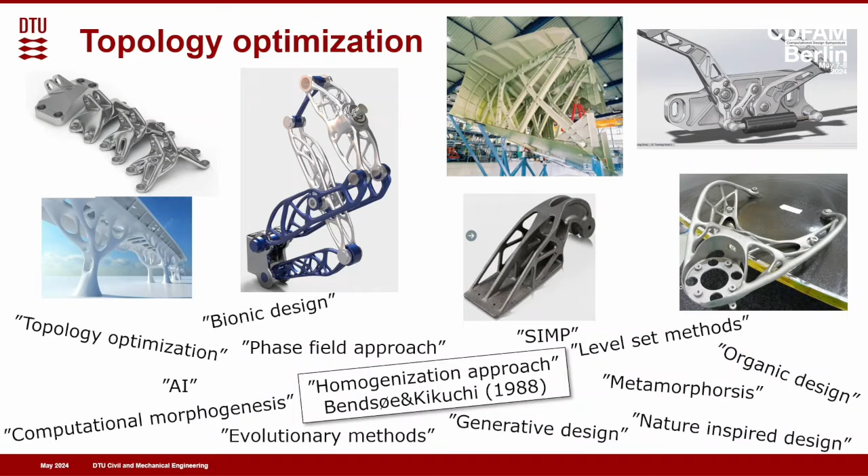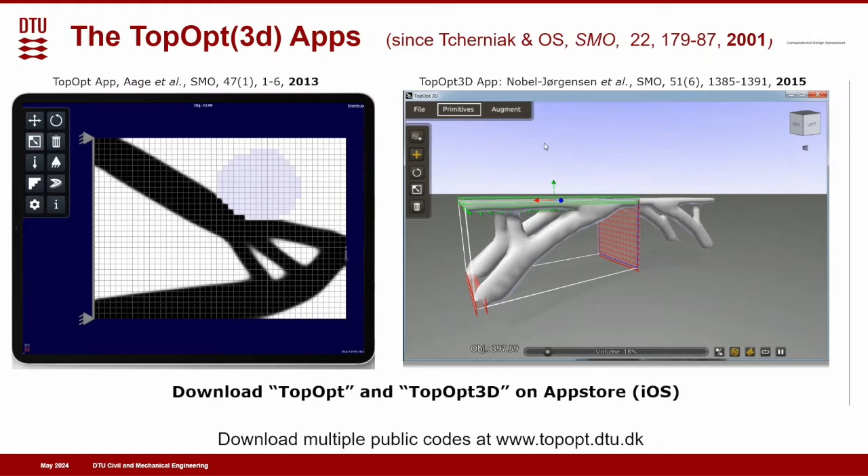First of all, we have been advocating interactive topology optimization apps since 2001. I hope most of you have seen these apps. If not, I invite you to download them on your iPhone. We have the 2D app and the 3D app for topology optimization. I would say it's almost addictive to sit and play with these.

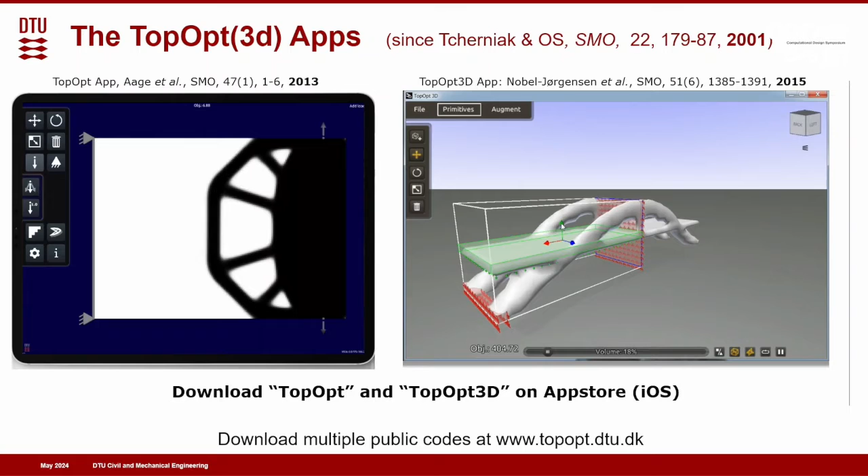What's also interesting is that the 2D version on the left is actually just a real-time screen dump from my iPhone. So you can do this real-time, change boundary conditions, add passive domains and all kinds of stuff. The movie on the right is the 3D app. It's sped up a little, but I think even with a new iPad this would also be real-time.

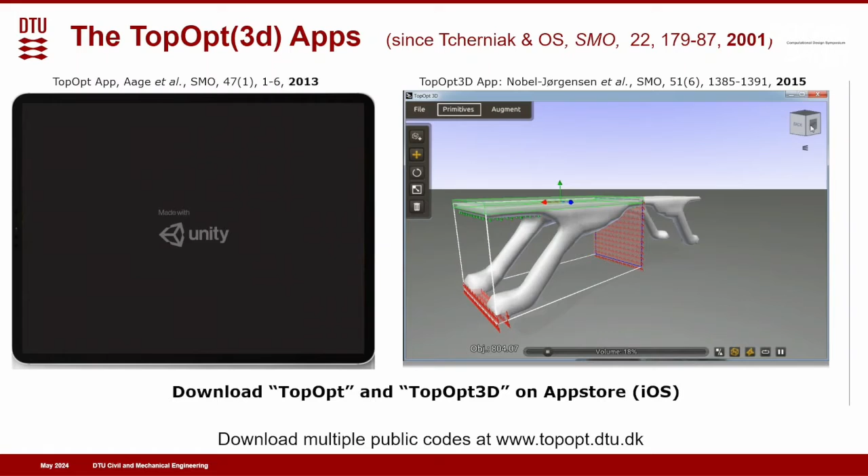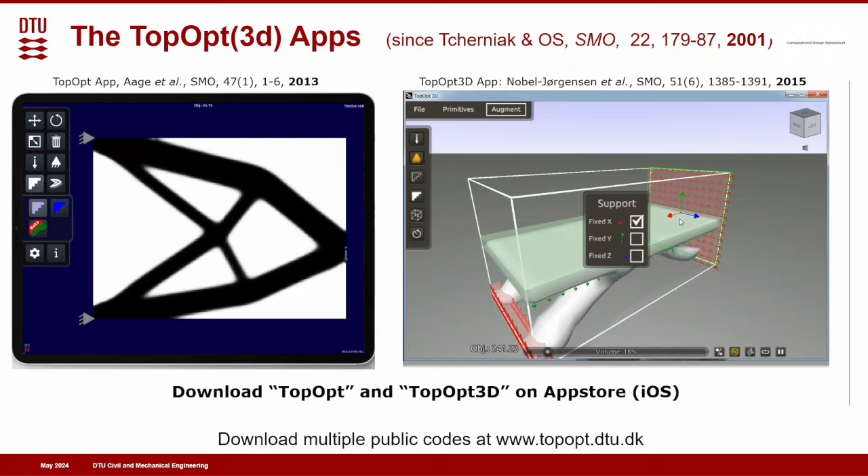So there's a lot of fun playing with these, and I think it also demonstrates how efficient gradient-based topology optimization actually is. This was one aspect, and I'd say it's also really hard to compete with it if you don't use gradients, or even if you want to use AI, and I will come back to that in a second.

The other application area we have been looking at is pushing towards very large structural design problems. So 6 years ago, we were the first to do topology optimization with more than 1 billion finite elements, or design variables actually. This is why we call it gigascale topology optimization. We did that for a Boeing 777 wing structure and showed potential weight savings there.

A couple of years later, we went to a bridge design, a suspension bridge. We discretized the design with 2 billion design variables and 7 billion degrees of freedom. We showed potential savings of 30% on the bridge deck itself, and with knock-on effects, 20% weight savings on the full bridge, or potentially we could make longer span bridges. That was in collaboration with civil engineers.

So these were both, I guess, success stories of what can be done in topology optimization. What wasn't so good is that the wing study required 1 million CPU hours on a supercomputer, and the bridge structure required 2 million CPU hours. So obviously there's room for improvement there. We would like to cut that down.

If you read a lot of the literature and articles on the internet, people would say, hey, this is a nice occasion. Many of the citations we get are from AI papers saying this stinks because it uses so much CPU power, let's do this with AI at the click of a finger. I'm not sure this is the way to go, or actually I'm pretty sure this is not the way to go. And why is that?

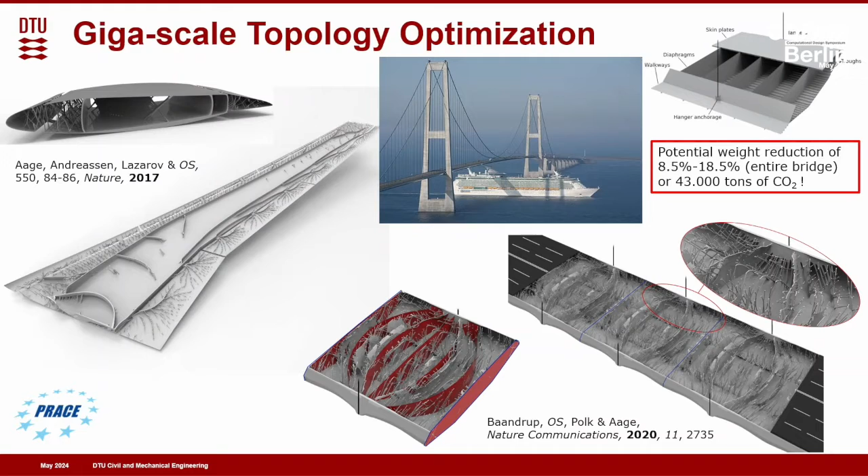Partly we are PDE-based optimizers here, so providing training data for this is extremely expensive. We can also set up other things, but I will come back to that in a second. I'll just refer you to a review paper done with my former PhD student, Rebecca, who is sitting here.

She dug really deep into the whole literature on topology optimization using AI. We divided it into 5 different areas: acceleration methods, reduction, post-processing, design, and diversity, and then what we could call the wet dream of topology optimizers, directly substituting standard density-based topology optimization with AI. And why doesn't it work?

I already said it's expensive to generate data, but there are also other issues here. For example, if we generate a lot of training data, as Andreas said, well, AI is just an interpolation, so we are not going to go outside the training data. We may get designs that interpolate between different training data, but if we are optimizers, we expect to get out there, and that's really why we are here.

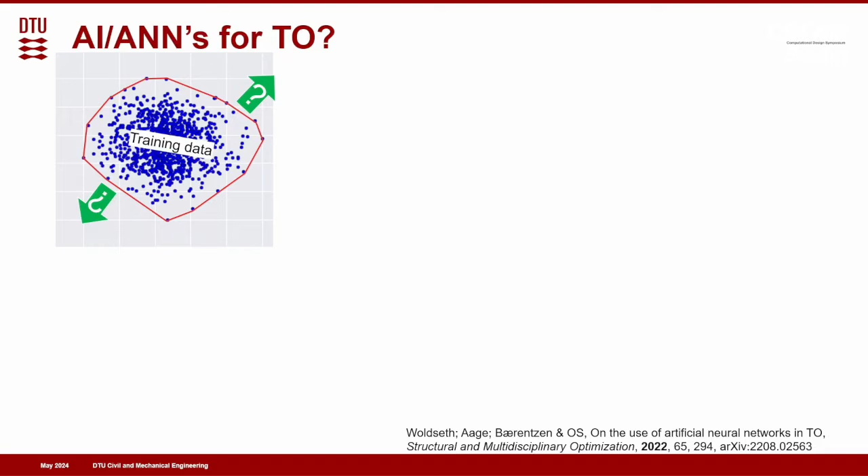We want to make the best possible use of materials and resources. Other things are that actually the training data is disjunct. You could have a very simple design problem: just a vertical load, and 3 supports at the bottom. The optimized structure is just a vertical beam. But you make an epsilon perturbation of the direction of the load, and suddenly the topology changes. It needs a side bar also to support it. So how do you do interpolation in AI, when you actually get significant changes in the topology?

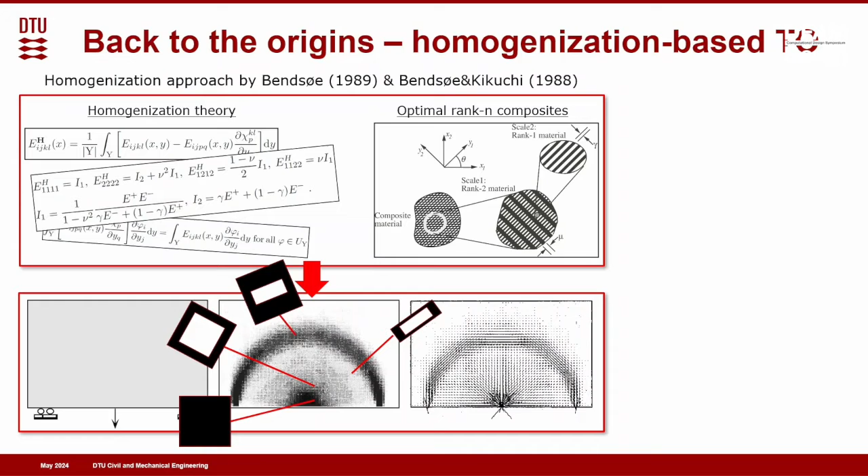I'll come back to that in a second, but just to mention, we know the optimal stiffness and optimal microstructure. In 2D, if there's only one load case, it's perpendicular laminations. If we have two or more load cases, we also know the optimal microstructures, and they can be found analytically.

In 3D, interestingly, for one load case the optimal microstructure is sort of a square or rectangular hole structure, a closed wall cell. If you have two or more load cases, there are more layers in different directions, up to 6 or 7 if you want symmetries and periodicity.

This is an interesting point to make: truss lattice structures are not optimal. They are, in fact, 2 to 3 times less stiff than closed wall structures. I'll come back to that later, but there has to be good reasons to do truss lattice structures, because usually they are so bad it would actually be better to do solid structures.

For now, I'm going to talk about closed wall structures, and obviously if you're doing a powder-based process there might be some issues there, but then you have to acknowledge that. So what do we do here?

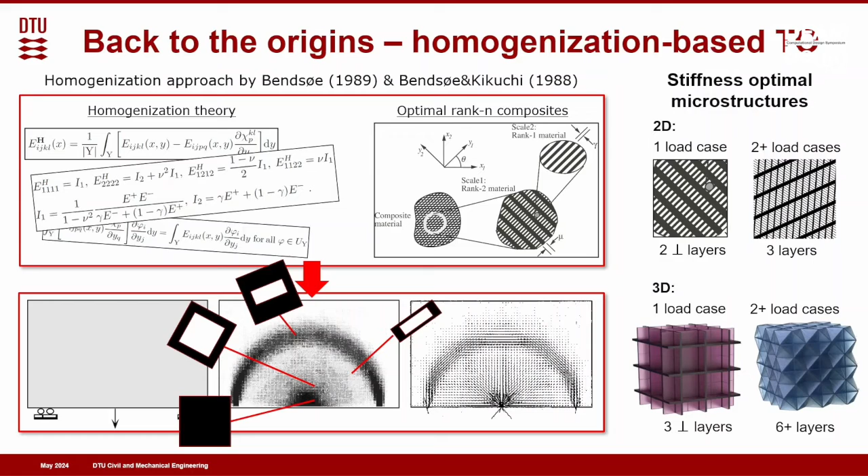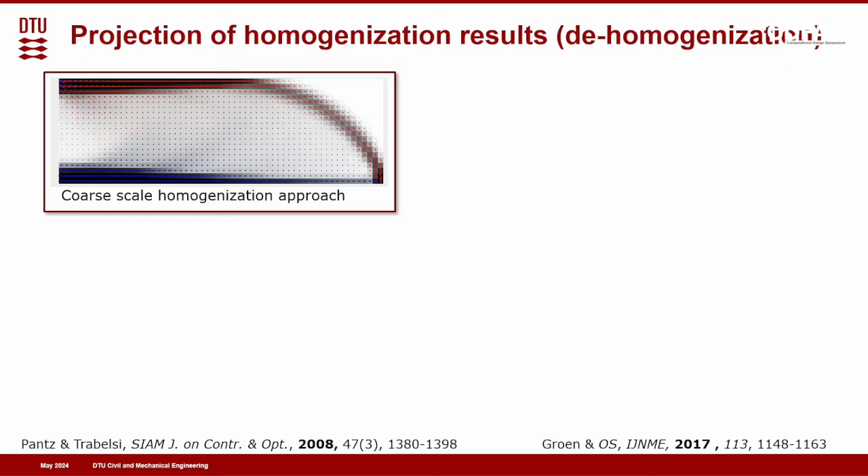For the dehomogenization, we do exactly what Bendsøe and Kikuchi did 35 years ago. We have a coarse scale, and we do a local optimization with 3 variables for this one load case problem: the orientation and the lamination thicknesses. It gives us this mushy looking picture here.

Then we have an intermediate step where we introduce 2 auxiliary fields with the special property that their gradient at any point corresponds to the direction of the composites from the homogenization solution. This is a least squares problem we have to solve.

If we take cosines of these fields, we get these nice zebra patterns. Then if we take those 2 zebra patterns, reintroduce the lamination thicknesses and put them together, we get these beautiful and highly optimal structures, close to the theoretical optimum.

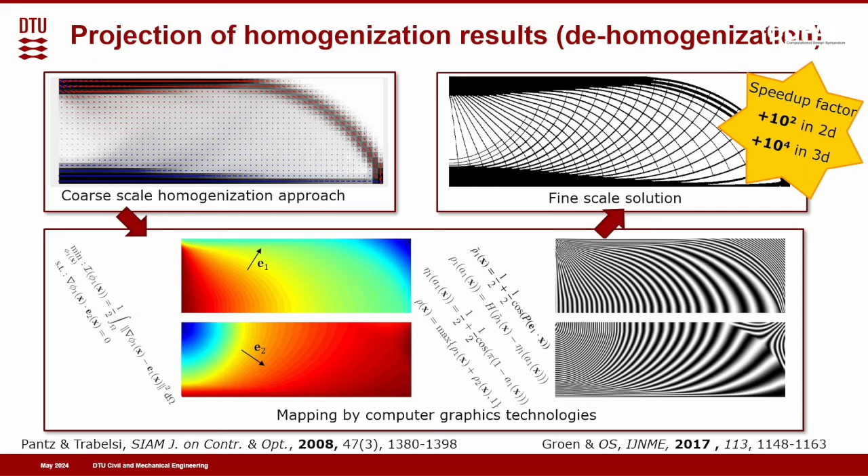The nice thing is that compared to a similar topology optimization procedure, we gain something between 100 and 10,000 times in CPU speed up. So this is an extremely efficient method, and I can show you lots of pictures.

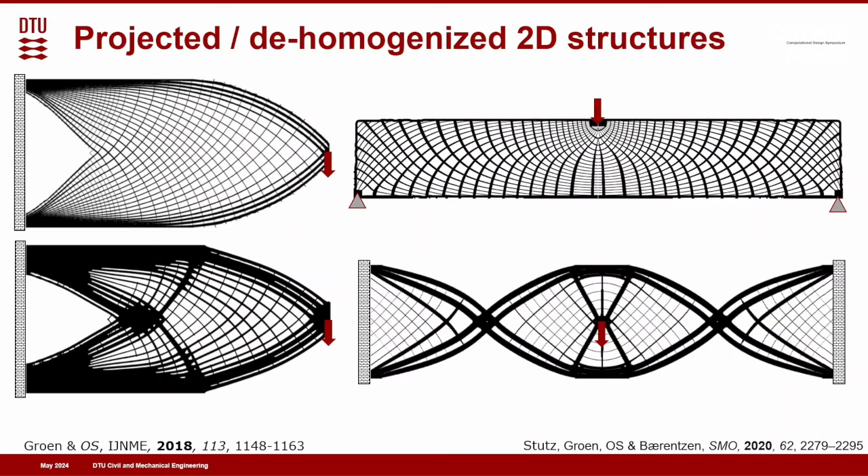These are some of the structures here, and you can sort of see that form follows function - this material is ideally oriented along the stress path all over. Interestingly, we just have a few percent performance decrease compared to the theoretical optimum from the homogenization-based solution. We get very close to these, but at a fraction of the time.

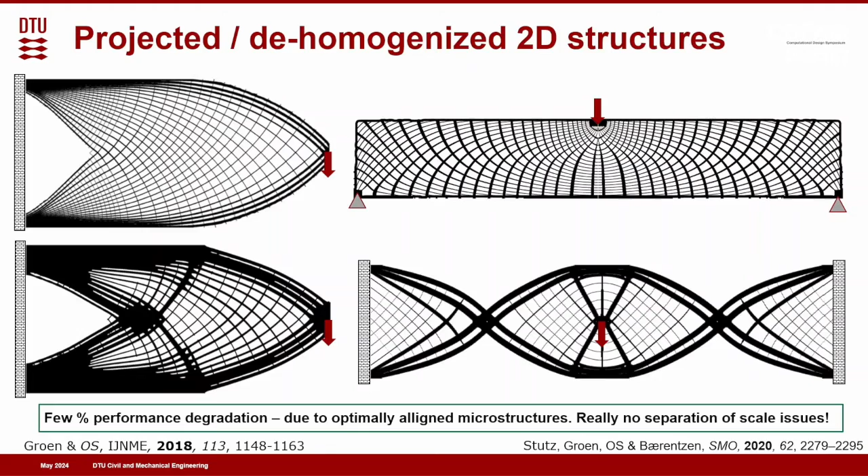Just to show you, this was a single load case. This here is multiple loading cases, also done by my other former PhD student, Peter, who is here in the audience.

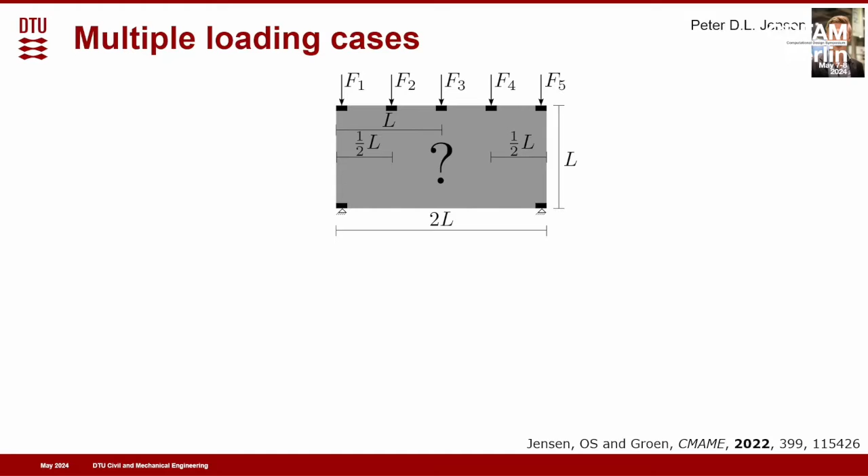This is a standard test case in the field, 5 load cases. We need to distribute now 3 different lamination directions - there are formulas to do that. This is a homogenization-based solution, again with these mushy gray pictures.

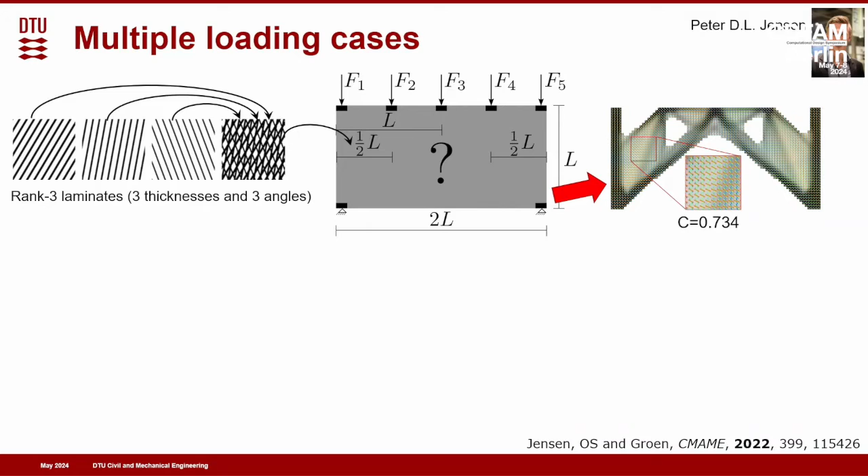As a reference, we can do a topology optimization, just a crude Matlab implementation with a very fine resolution. We can get a compliance that is just a few percent, or 1%, above this theoretically optimum structure. But it costs almost a full day of CPU time on a laptop PC.

Now with the dehomogenization approach, this is just a computer graphics thing. We do the coarse optimization, then map the structure to this anisotropic rank 3 structure. We get very similar compliance, just a few percent increase, and we do it within minutes.

Finally, if you say, okay, I insist, I want to have a triangular microstructure that we still can grade - well, we could do that also with the dehomogenization approach.

It's more efficient, we admit that, but it's at the cost of another 10-15% increase in the compliance, or decrease in the stiffness. So really you want to do these locally adapted microstructures to get the full benefit.

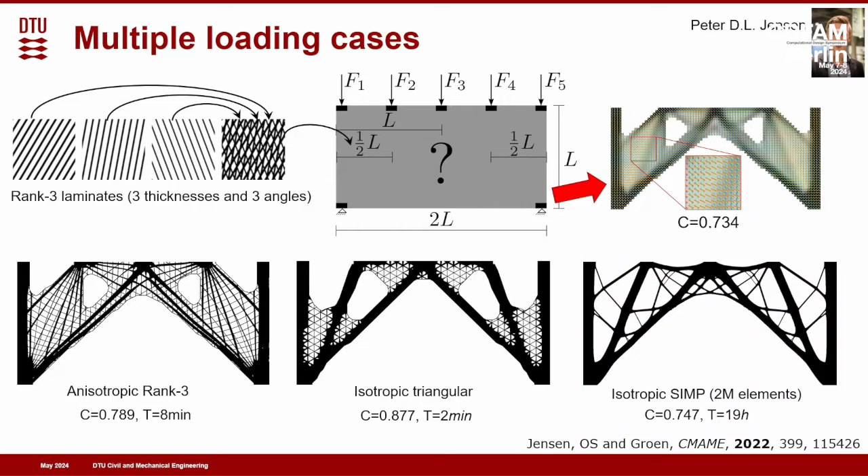And we also see here it doesn't really want the microstructure. It does it here for multiple loading cases, but if we just had one load case, it wouldn't like the triangular microstructure at all. So this was in 2D.

Peter and co-workers have done the same thing in 3D. So we have solved the very famous GE jet engine bracket. And with these layers, you can also start controlling how many layers you want to have locally. Ideally, the optimization just selects how many layers it wants, but you can also enforce to have 3 layers, for example, to get more stability, and I will come back to that.

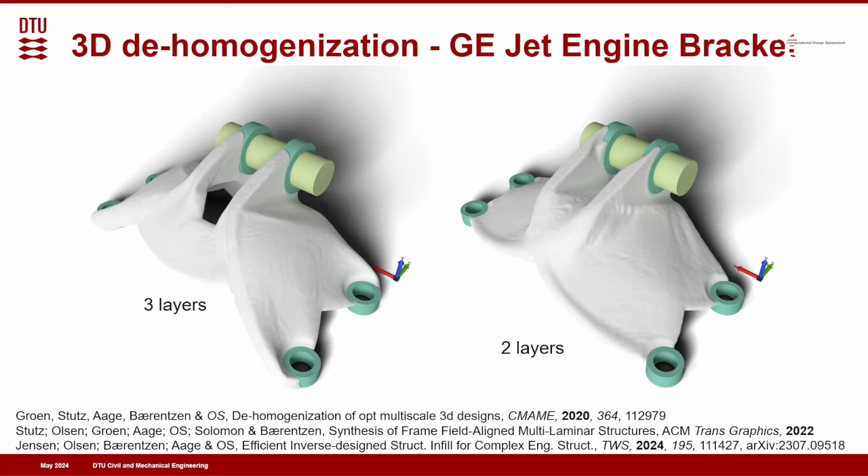So the disadvantage, of course, of having optimal closed structures is also you don't see the beautiful structures that are inside. And maybe that is a sales killer when we are in additive manufacturing, but that's sort of another thing. So this works really nice, but it still takes some time. This example here still runs for some hours to get these results.

I said before we had thought that we had an idea of using AI to do this dehomogenization. It could be trained on artificial data. We actually showed we could do it more efficiently. But in that process, also in the process of writing the review paper, Rebecca and our colleagues in the computer graphics department came up with a different idea to do this.

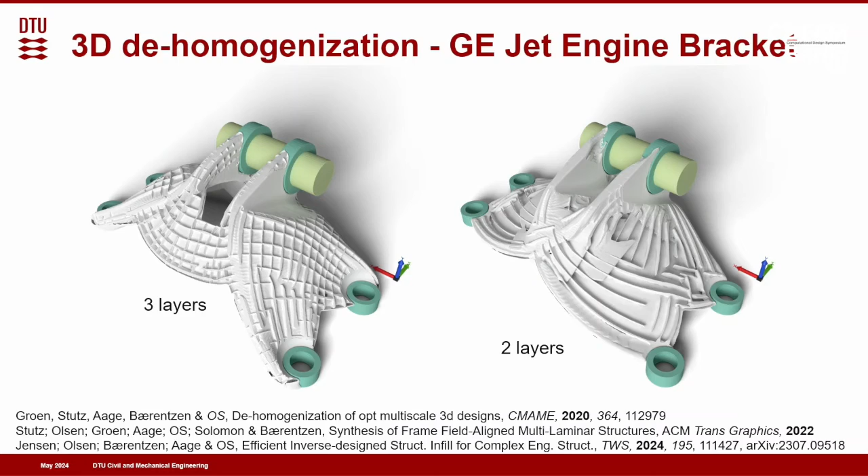And so essentially, again, I cannot go into the full details, but we are using processes that are called something like procedural noise from computer graphics. These are extremely efficient ways to both make surface texturing, but also generate geometries. And essentially, they are run on GPUs in a fraction of a second.

And that idea is the same. We do the basic homogenization-based topology optimization, but then instead of introducing these intermediate fields, we introduce so-called phasors or complex Gabor functions. And these are sort of small circular domains that have waves in them. They overlap with the neighbors, and in an intricate way, they generate these zebra stripe patterns.

So on the outside, these are not connected. There are different things. There are singularities when there's divergence in the field. But with some ingenious post-processing, Rebecca has turned this into something that always ensures connected structures and satisfying the length constraints and stuff like that.

And again, I'm not going to go into all the details here, but it works also in 3D. We are submitting that paper very soon. But again, it's a smart way from computer graphics, and you actually don't need to have the whole geometry in your computer. You can sort of do it layer-wise also during the manufacturing process. So this is a very nice approach.

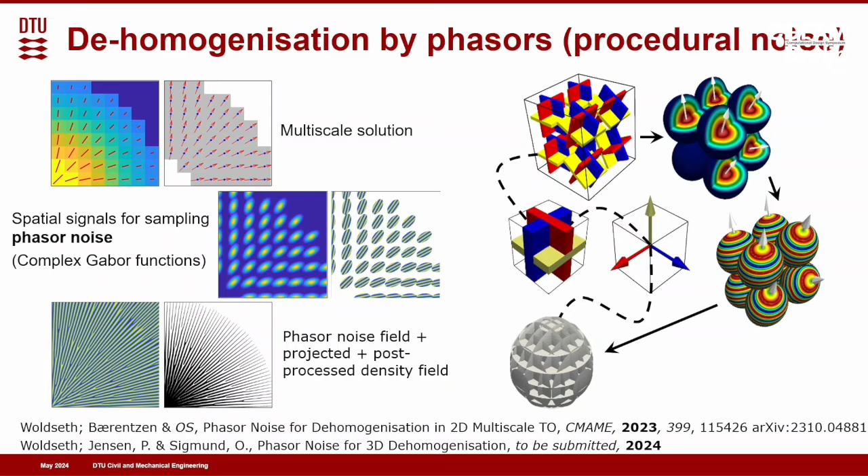And I just want to show you a couple of pictures here. So these are the dehomogenization approach in 2D. You see they're a little bit more organic due to this not having a global field that controls it, but it's more a local thing.

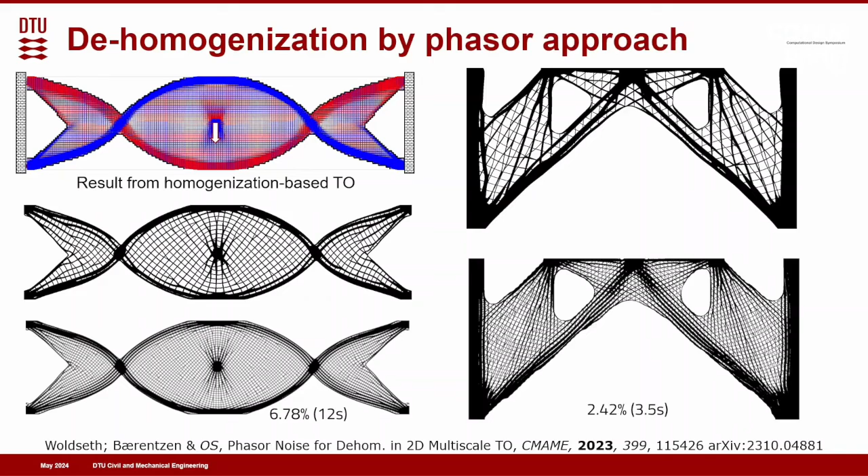But this is extremely efficient, as I said. Essentially, it's much cheaper than the topology optimization process itself. And this also leads to us approaching being able to do real-time multi-scale dehomogenization approaches for topology optimization. So we are going to publish next week, I think, when we are back from the conference, a Matlab code that does this, that will be free for download.

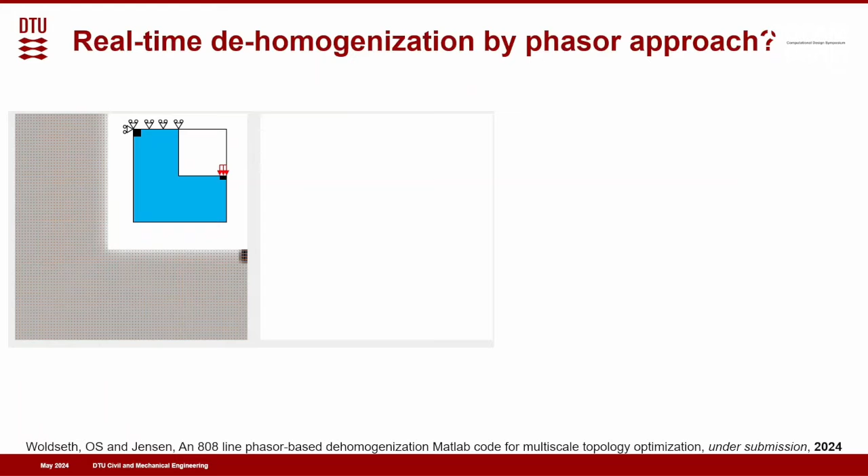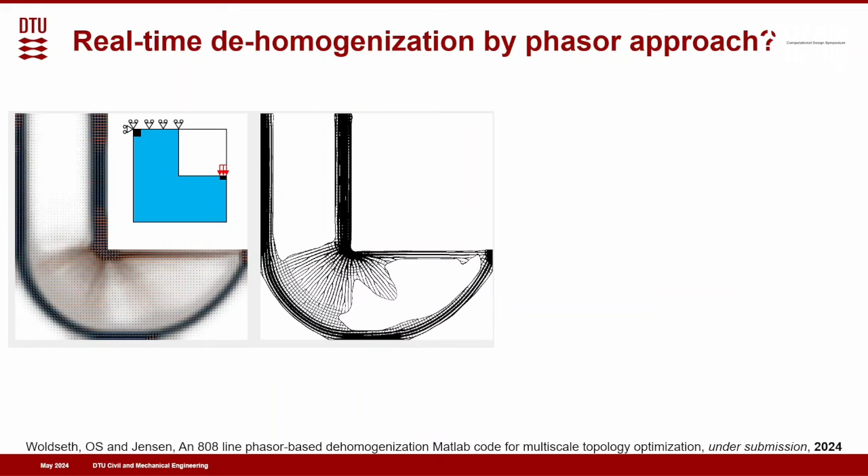And so we have this little L-beam example that's also often used. To the left, I show the homogenization result, and in the middle picture, I will show you sort of the on-the-fly dehomogenization. So we are running a couple of topology optimization iterations, and then at the same time, we are generating these multi-scale structures very efficiently using this phasor approach.

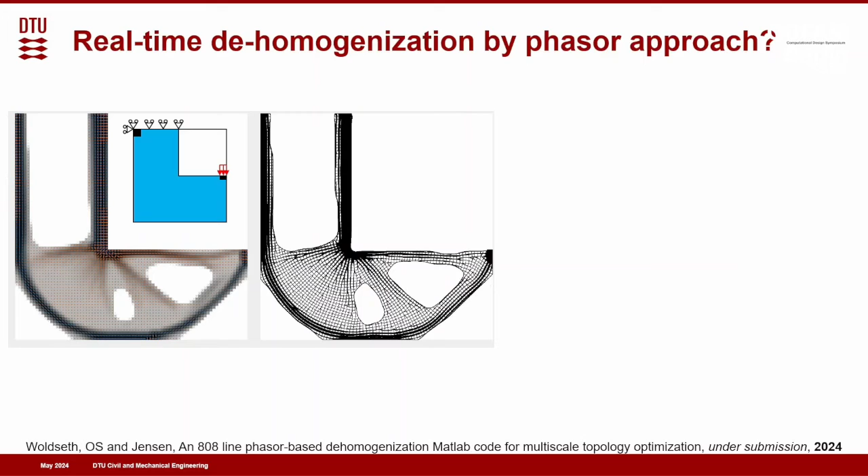And so with this efficiency, we are hoping that maybe next year, if Duane makes the conference again, we can actually offer you an app that has this multi-scale performance there.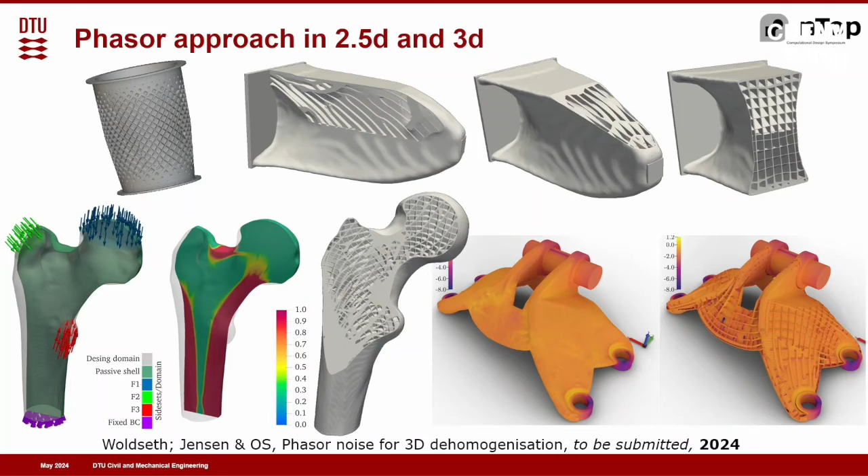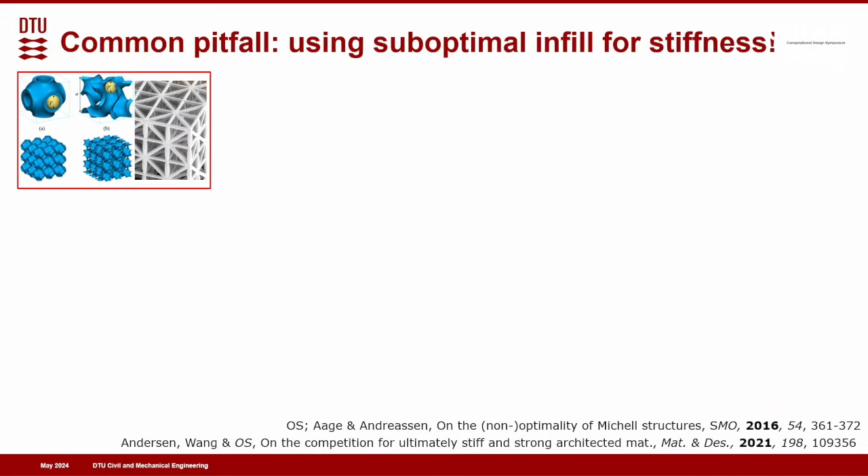Let me try with one slide to give you some more insight into why we need closed-wall structures. We see it a lot here, and also at this conference, that it's tempting to use either open truss lattice structures or TPMS microstructures in your design. Definitely they generate very beautiful structures, but sometimes it's quite dangerous to take an already optimized design and just substitute microstructure into it without doing additional verifications and optimizations.

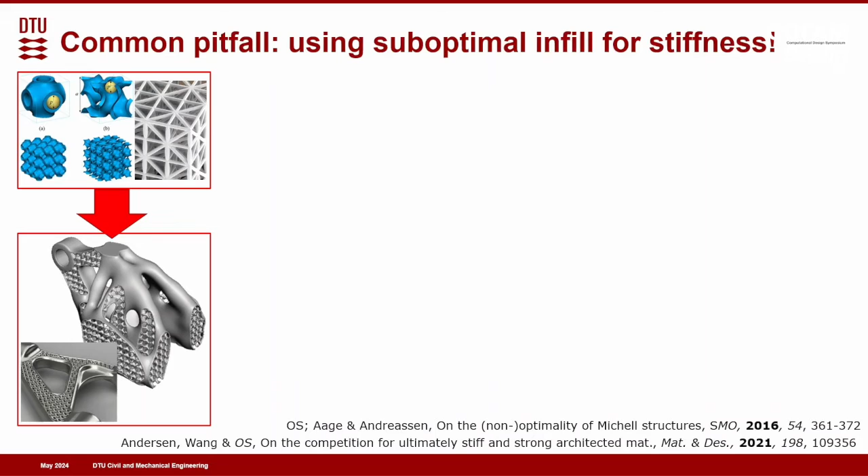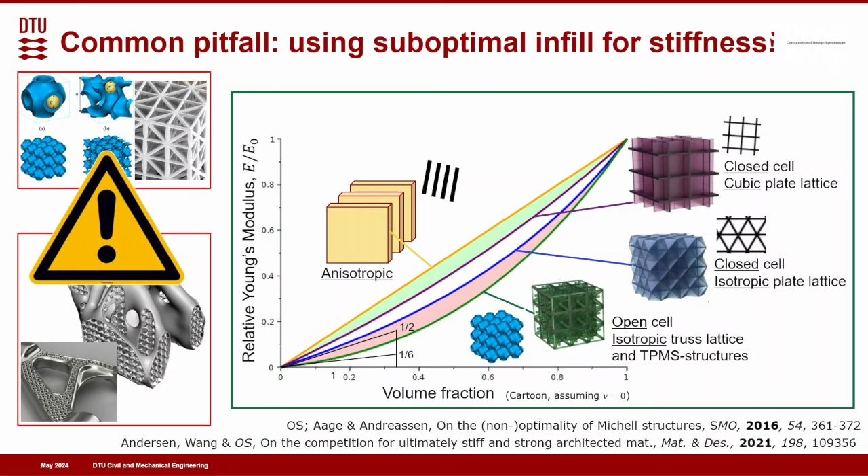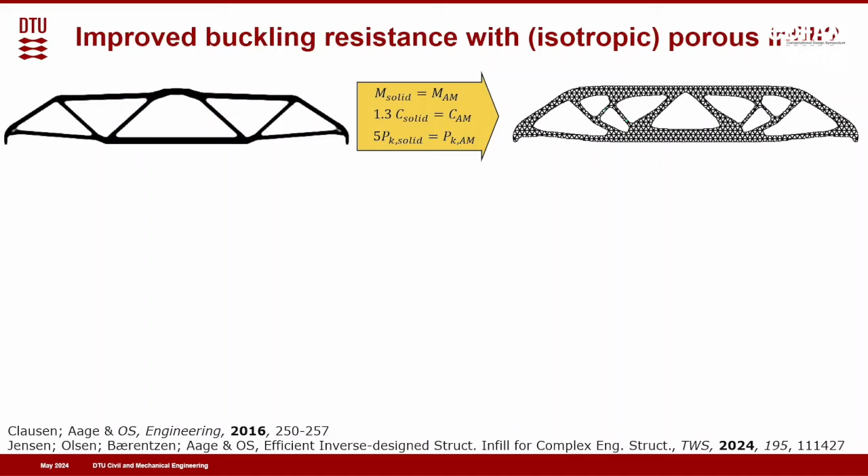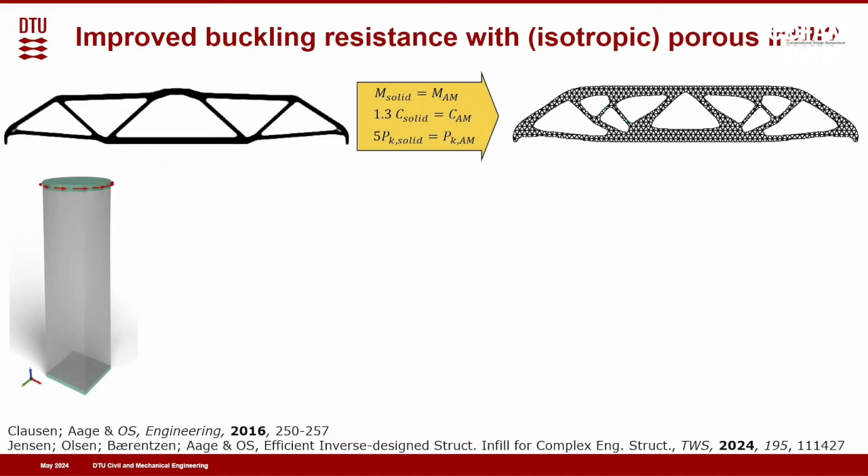So that might be a motivation: use microstructure to get better stability. Peter also has an example where we took this famous 3D test case, the Lotte Tower, where we have torsion on a box that is square at the bottom and circular at the top. If we just have one layer microstructure, the optimal one, we just have a shell like a pipe, but it has very low buckling resistance because we get these global buckling modes. If we insist on microstructure there, we decrease the stiffness but increase the buckling resistance—the buckling becomes local instead. You see it in the very bottom here somewhere. So this might be a reason for microstructure.

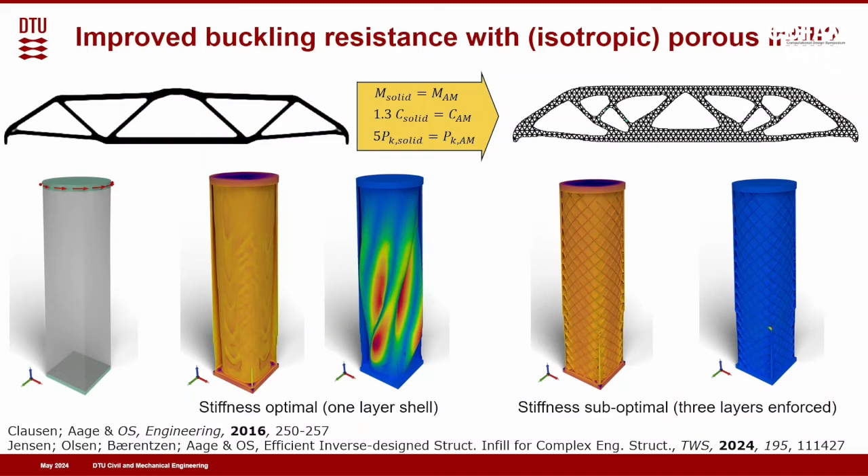But these were sort of lucky punches. We cannot always be sure, and actually the top structure, the 2D lattice structure, didn't fail by global buckling—it failed by local buckling in the lattice structure. This means we have to actually include that in the optimization.

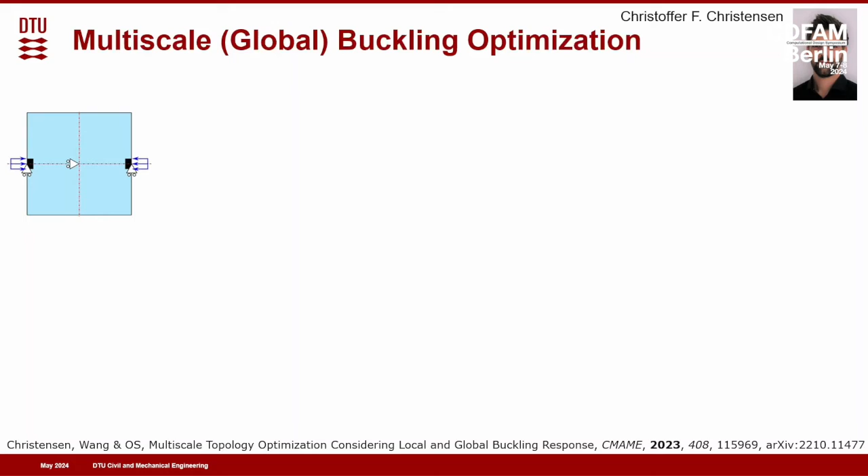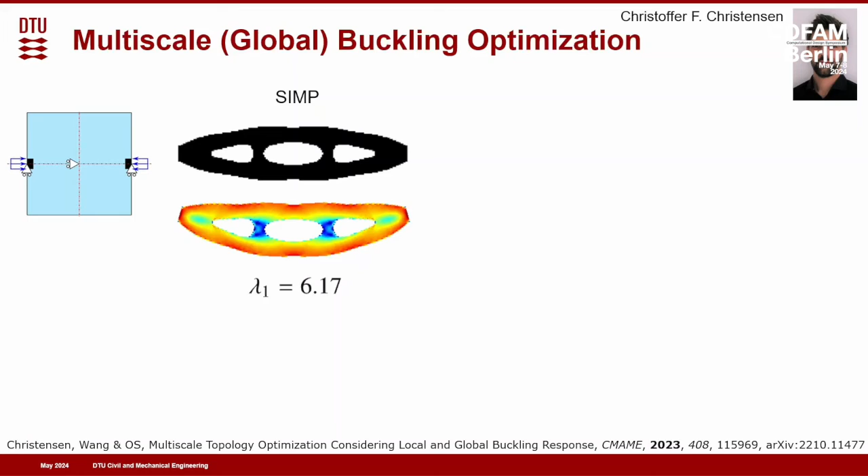So let me just show that. That's work by another PhD student—a very simple buckling example. We have compression horizontal from both sides of a box here. If we do standard topology optimization for buckling resistance, we get a certain buckling factor, 6.17. Here we didn't allow microstructure. Then we said, okay, now we allow microstructure, and it can grade the microstructure, but it's a triangular isotropic one.

Then we get a slightly higher buckling load. That's nice, that motivates the need for lattice structuring here. But if we dehomogenize that, actually realize this structure by making the full analysis of it, it turns out that it's buckling, getting unstable in the lattice structure. So in this case, we didn't gain anything from latticing again.

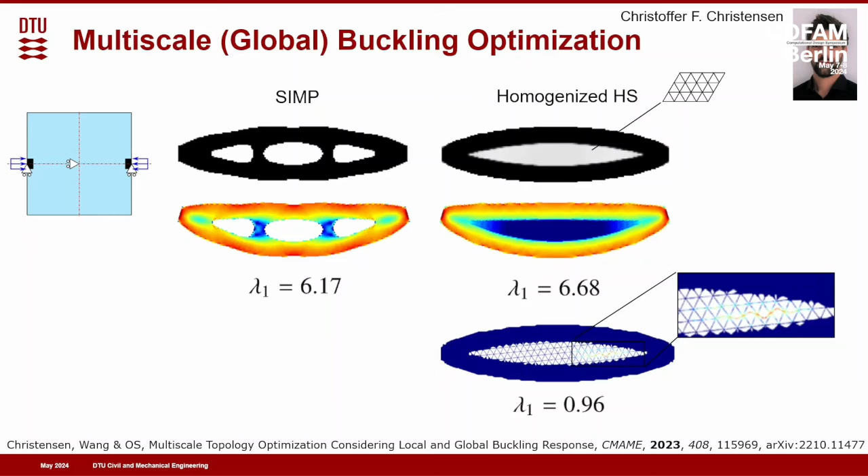This means, as optimizers, as academics, we have to include both the global and the local buckling in the topology optimization part. And that turns out to be pretty heavy. You have to do analysis of the microstructure, consider all possible buckling modes, for loads in different directions and all this stuff.

From that, you can generate a buckling yield surface, as I've indicated here, for different volume fractions of the triangular microstructure. But that's not enough, because the structure can fail by local buckling, but it could also fail by local plastic yielding. So you have to also compute the plastic yield surfaces. It becomes extremely expensive.

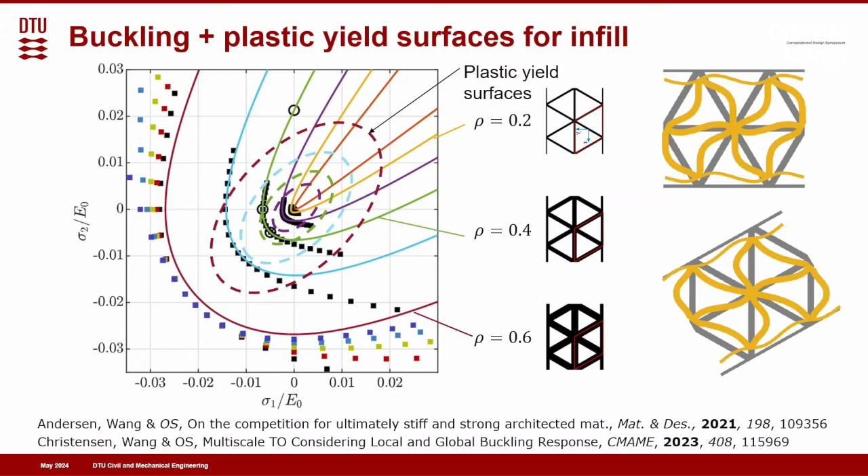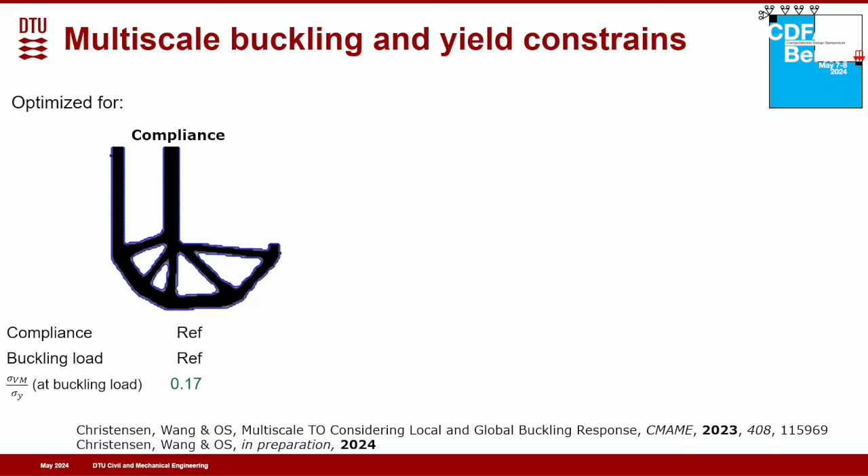Then we say, okay, let's optimize this structure for buckling. And nicely, now we get a lot of gray area, meaning there's a triangular lattice structure there. We see that the compliance goes up by 25%, so stiffness decreases, but we gain a factor of 20 in global buckling. That is extremely nice, right?

But that's sort of a side thing, the microstructure will yield. Let's wait a second with that. The problem here is also that in these low gray regions, we have very low density of thin struts. So if we actually optimize also to prevent local buckling, we get this structure. What you see now is that we don't have any low density regions anymore, we have fairly high density regions because we want to avoid local buckling.

So now we still have a 25% decrease in stiffness, but we still gained a factor of almost 7 in buckling, both local and global, but the structure will yield plastically before it buckles. So if you also add the yield constraint, we end up with this structure that is actually a little bit better in compliance, keeps the buckling load, and satisfies the yield stress also.

But what we also see is here latticing disappeared. So this also depends on what material we are building in. The main message here is it's really difficult to work with latticing, and you have to be critical. Lattice is not just a nice way to do light weighting, you may also create big accidents by introducing latticing. So keep that in mind. I hope you will think about it.

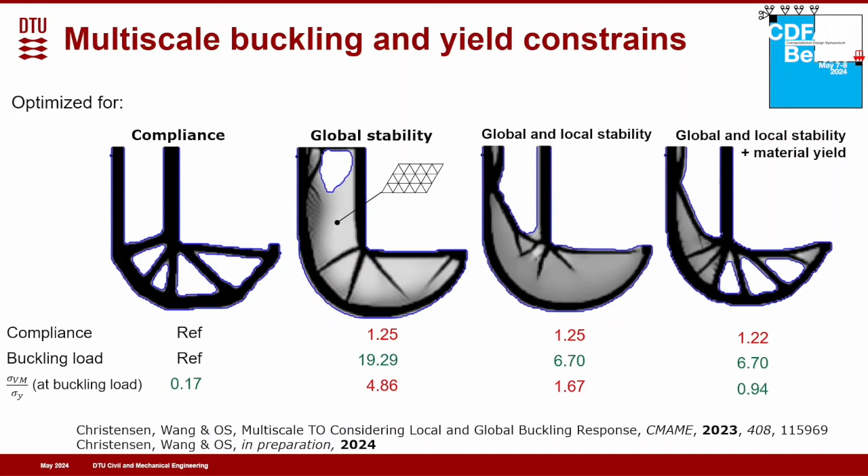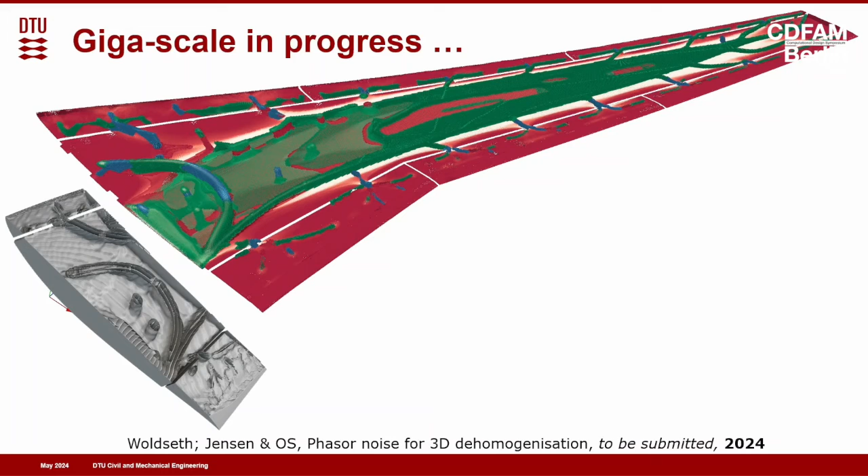Our goal is really partly to do the dehomogenization, but also in 3D to include these yield surfaces and actually optimize the local microstructures for buckling and stuff like that. So this is some of the stuff that we are still working on.

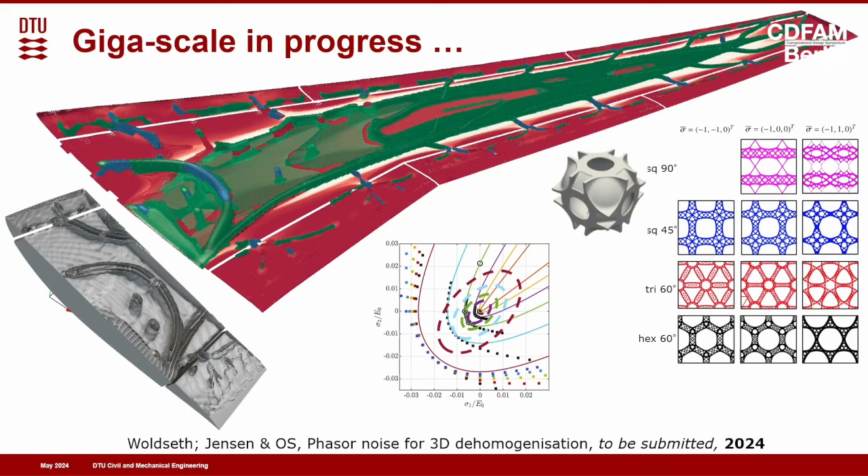I also want to mention a few other things we are working on. This slide is showing, to the left first, that this phasor-based approach has a lot of potential. Definitely we can also do open cell lattice structures with it, that's not a problem. As optimizers, we just don't want to do it because they are not optimal. But we can also do all kinds of interesting surface texturing, not just project simple layering, but also project more fancy structures, which I think might be interesting for some of you guys.

Then we are looking into multi-scale feature mapping. So instead of just having free designs, we have restricted design freedom, and we do that again with multi-scale. That's also Peter's work. We are doing all kinds of fun things, so thermal cloaking devices. And we are definitely looking into the topology optimization with uncertainties. You see this little gripping mechanism here.

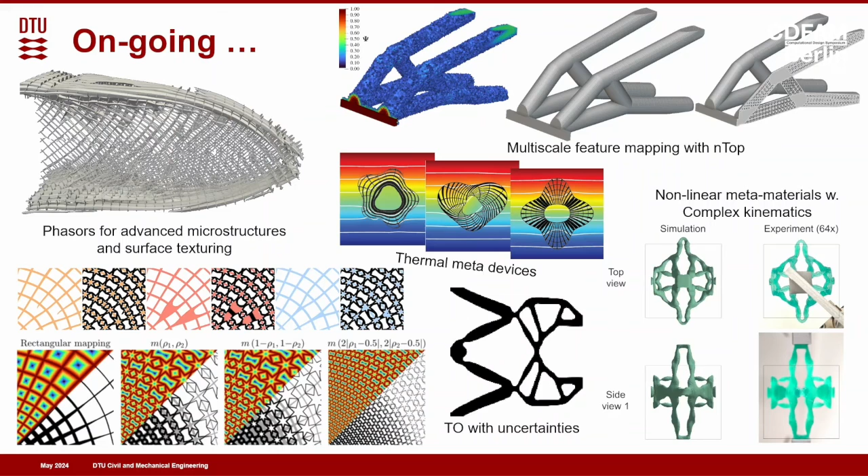And we are doing all kinds of exciting stuff, doing really complex metamaterial kinematics, as you can see in the structure at the lower right, which sort of has a thing when we pull it, in one direction first goes out, then in, and in the other direction it goes in and out first, and makes these very weird organic-looking structures. So we have lots of activities going on there.

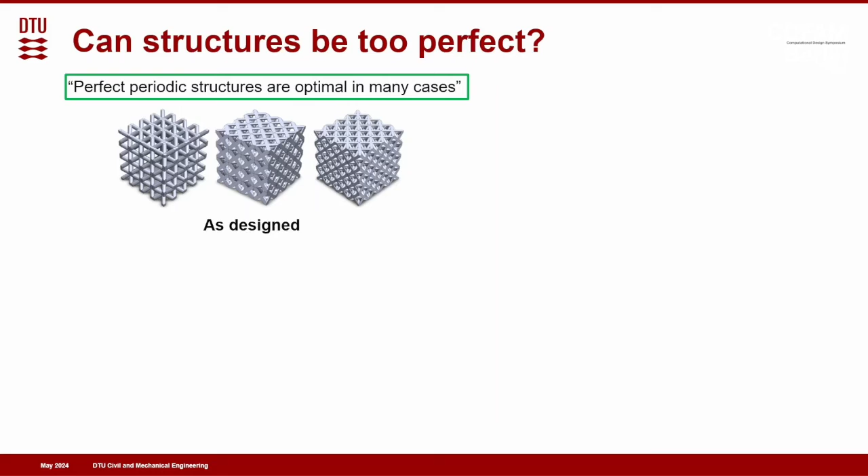At the very end, and maybe I could skip it because Andreas was alluding to it, can the structures be too perfect? We do take multiple loading cases into account when we do the optimization, but we also know that in many cases, ideal periodic structures give the theoretically optimal stiffness. But, and I don't have the same nice pictures as Andreas had, reality is different. They never look the same when they have been through the 3D printing process.

And so our question, which gets a little bit more philosophical, is will the optimal structure still be periodic if we know that it cannot be realized as a periodic one? So should we already introduce randomness in the structure during the design process such that it gets less sensitive to the manufacturing process and stuff like that? So these are some of the things we are looking at.

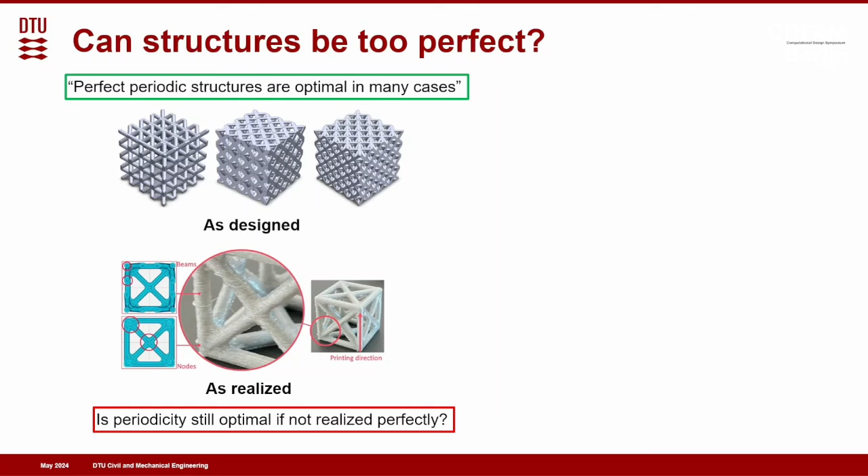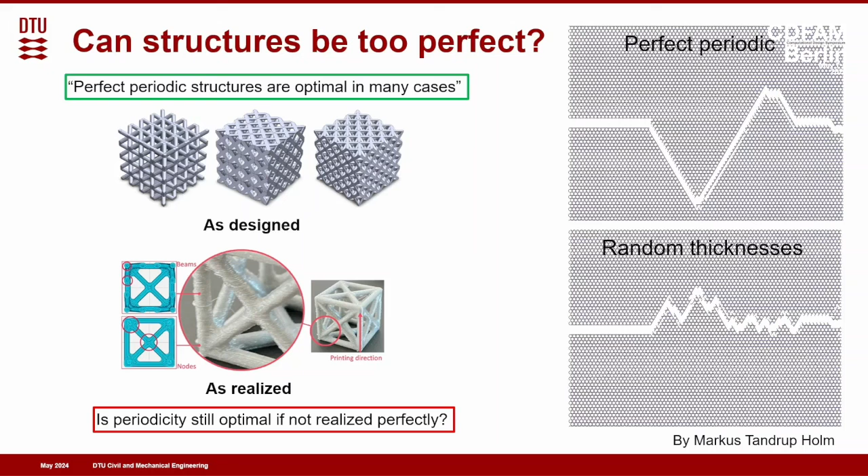So there's definitely some potential, but it's a horrible topology optimization problem to do because the crack will go all kinds of directions when we optimize. But that's why we are still here. We have challenges to do different optimization methods in academia.

So with those, I will just list a couple of topics to think about, and I hope I've made my points here, that you have to use AI or machine learning for the right purposes and don't oversell it. I don't think it's a good way to do topology optimization. If somebody has an application or read a paper where you believe they beat standard optimization methods, I would be really happy to discuss with you about it.

Then please also evaluate this break-even versus generalizability issue there. Is it really worth spending time on training AI if it's never going to be used and is not generalizable? And also, I hope I convinced you that we have to look at latticing and infill with critical eyes, because it's not just an easy way to lightweight. You have to know what you're doing when you do it.

And well, I've already listed, we have different challenges. We are working on speed and interactivity. Also, and we have heard that several times here, we can do fantastic structures and fantastic designs, but it's still challenging to actually verify them and model them afterwards.

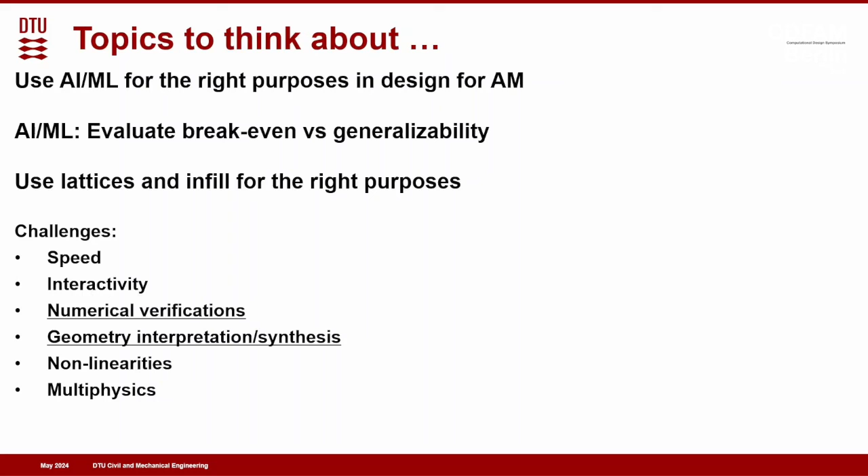I will quote Sylvain Lefebvre from computer graphics. He had this paper where he says we can build very complex structures that never existed in the computer before they actually started slicing. And so this is a fantastic deed. Our problem is they need to exist in the computer before we can simulate them, let alone optimize them. So this is what we are challenging with.

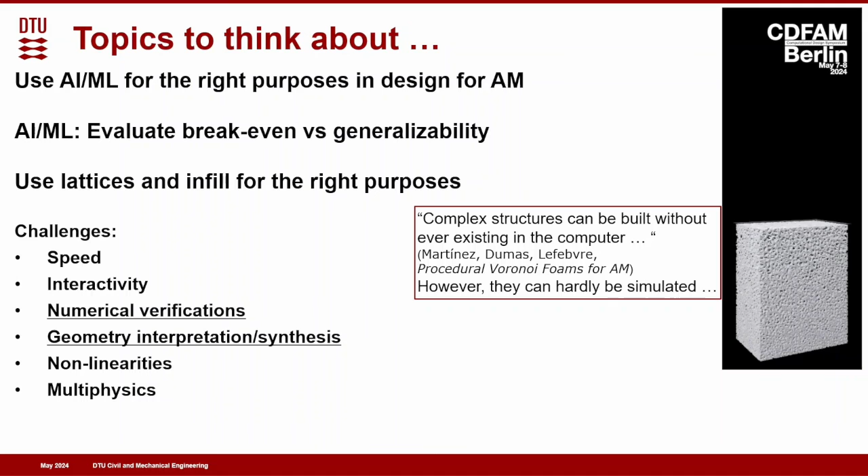And also all the dehomogenization stuff I showed you, that was projecting the structures to voxel-based geometries. But we are working on simplifying this process and directly projecting them to shell structures that then can be post-optimized, and we can do much more efficient post-processing of these.

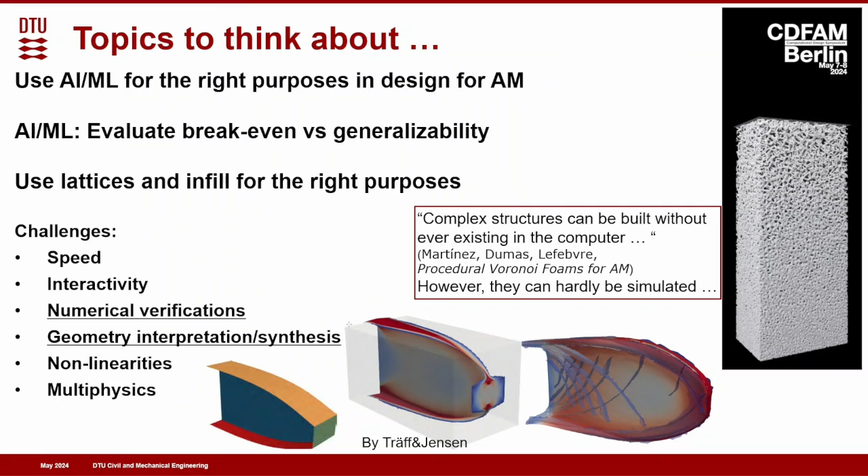So these are the words. Maybe I'm selling sand to the wrong community here by listing a lot of heavy papers, but you are really welcome to contact us, speak to Peter and Rebecca if you heard something you like here today. And I know I've also been provoking a little bit with different viewpoints here, and I'm really happy to discuss it with you during breaks and stuff. So thank you very much for your attention.